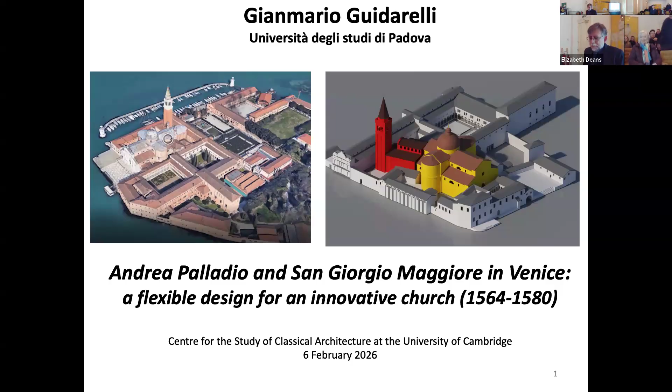And this is the topic of my next book. San Giorgio Maggiore is considered one of Andrea Palladio's masterpieces and one of the most important churches in defining a new type of sacred building after the Council of Trent. Many studies, starting with those by James Ackerman, Wladimir Timofiewitsch, and Christoph Frommel, have highlighted the relationship between the plan of San Giorgio Maggiore and the debate between centralized and longitudinal layouts that was taking place in Rome at the construction site of St. Peter's Basilica in the Vatican.

More recently, research by Andrea Guerra, Guido Beltramini, and Tracy Cooper has highlighted the difficulty in reconstructing Palladio's original design. In particular, there are still many doubts about the choir of the church and the facade, both built after Palladio's death, in 1581 and 1610 respectively. In this paper, I propose to respond to these doubts by adopting a different method for investigation, which takes into account two contextual factors that have been almost completely ignored until now.

On the one hand, the relationship between Palladio's design and existing physical structures can be reconstructed through recent archaeological investigations in conjunction with the analysis of unpublished sources, as well as the use of already known sources. But they can also be studied in an innovative way thanks to digital technologies, in particular georeferencing and 3D modeling, in particular building information modeling.

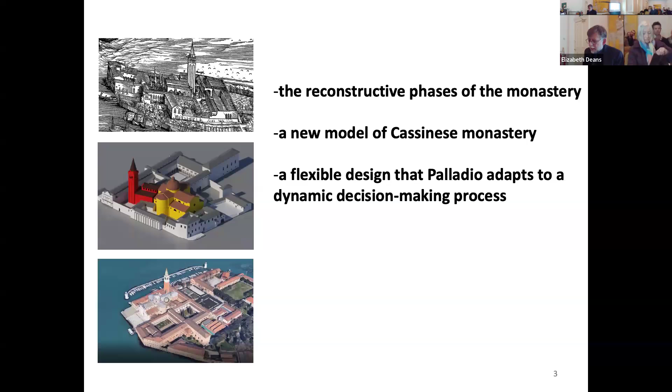In fact, I would like to demonstrate that the design and management of the San Giorgio Maggiore construction site may have been strongly influenced by the monks, who not only imposed design choices based on their needs as a client, which is normal, but also formulated a design program that the architect had to implement. The mindset of these Venetian monks is based on medieval tradition, but also on the reform of monastic life conceived by Abbot Ludovico Barbo at the beginning of the 15th century.

This reform led to the development of a new architectural type of monastery, of which San Giorgio Maggiore is one of the most important examples. The study of the Venetian monastery, in fact, is a part of a more general research project coordinated by me on the architectural culture of the Cassinese congregation founded by Ludovico Barbo in the Renaissance.

The aim of my project, Coenobium, is the study of the architectural and the artistic culture of the Cassinese congregation from a comparative perspective, thanks to the innovative use of the digital humanities.

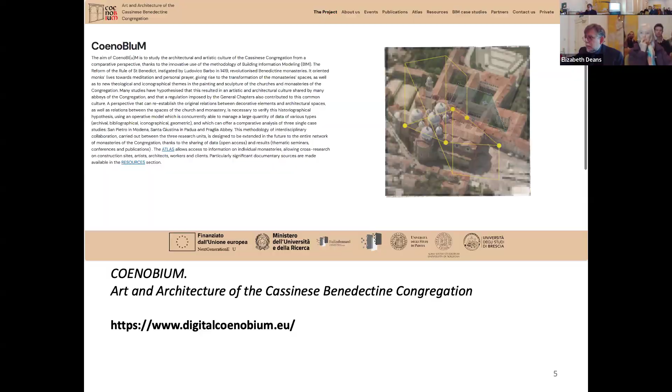San Giorgio Maggiore is one of the oldest monasteries in Venice. According to Francesco Sansovino, at the time of the first Benedictine community following the donation of Doge Tribuno Memmo, the existing church was rebuilt together with the new monastery.

The church, rebuilt again in the 13th century and renovated another time by the abbot Giovanni Michiel by 1519, is the one visible in the view of Venice by Jacopo de Barbari, surrounded by a complex system of cloisters, with the construction site of the new dormitory in full swing. You can see here the new dormitory.

The monastery portrayed in the woodcut by Jacopo de Barbari had been renovated in the previous century following the entry of the Venetian community into the congregation De Unitate, founded by Ludovico Barbo, definitively formalized in 1429. In particular, from the 1440s onward, the increase in numbers of monks made it necessary to plan the reconstruction of an entire cloister, the refectory and the dormitory.

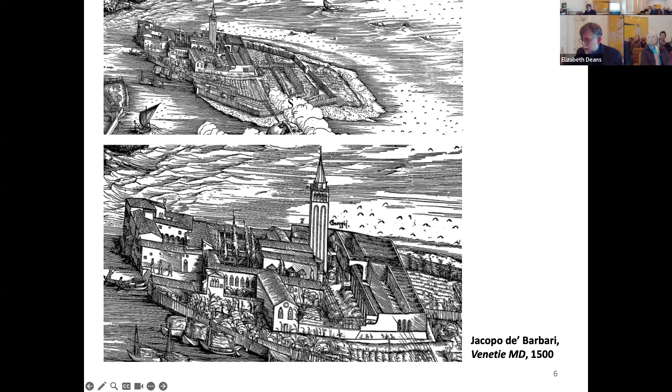This building program, however, only materialized in 1494 with the opening of the construction site of the dormitory designed by Giovanni Buora, and you can see here the construction site.

The study of a map that I published 2 years ago describing the complex of San Giorgio Maggiore in its late 15th century state, in the same year, I think, as the woodcut by Jacopo de Barbari, allows us to reconstruct its real shape in this moment, before the arrival of Palladio. The map preserved in the State Archives of Venice depicts the monastery with great precision before the complex was completely rebuilt at the beginning of the 16th century.

By analyzing the evidence, we cataloged the information provided by the drawing with the use of digital humanities. The isolation of the numerous elements classified and differentiated in the AutoCAD software, a software used by architects, in superimposed layers allows us to hypothesize the temporal sequence of the graphic execution of this drawing and to understand the subsequent phases of use of the design.

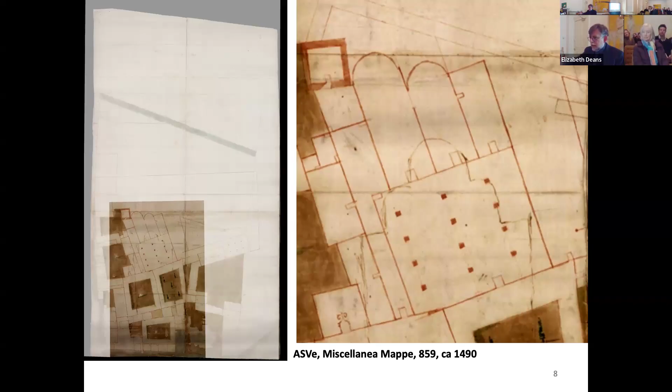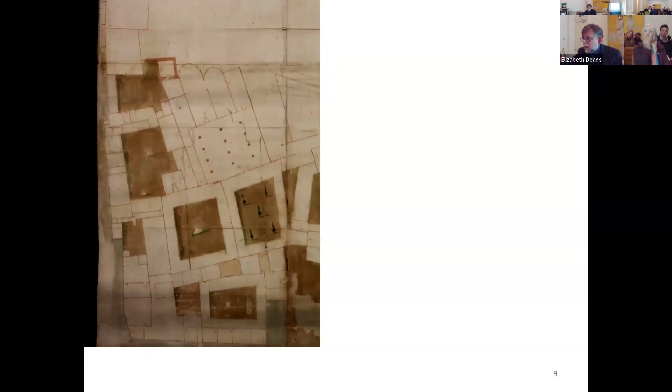By comparing this 2-dimensional image with other 3-dimensional views of the same area and with a large number of archival sources, we were able to create a digital model of the monastery and the entire island. We discovered that the plan later became a basic scheme on which to insert subsequent interventions.

In particular, in the central part of the drawing, a sketch was drawn with the plan of a new church. You can see here in our reconstruction. It is the original design, and it is the digital elaboration of the design. This is with the plan of a new church, which coincides with the one designed in 1520.

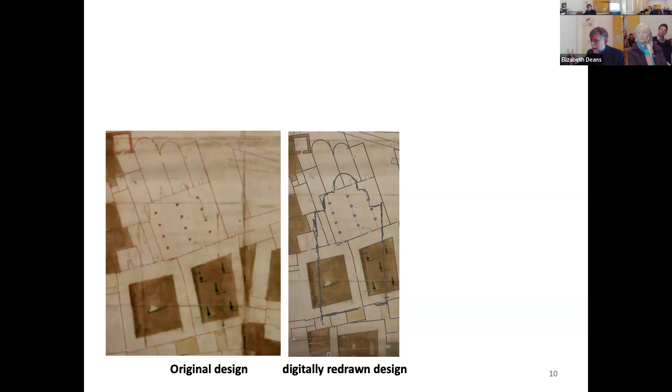This is the design of a new church not built, and you can see new sketches based on the design of a new church. So we used this map as a dynamic decisional process.

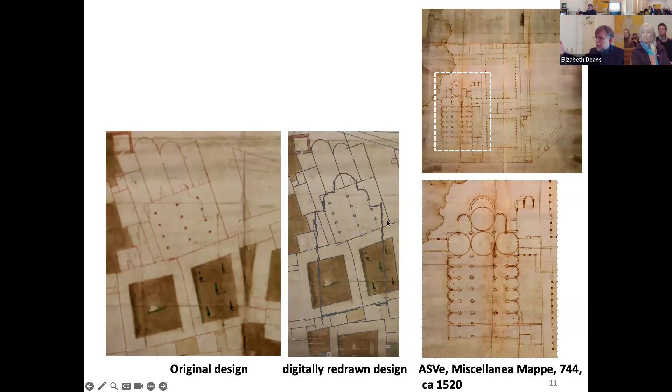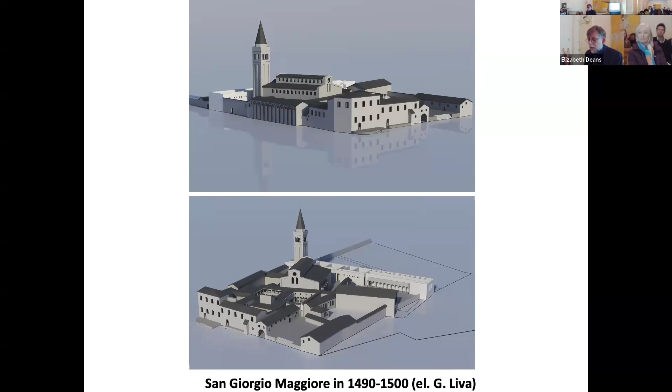The georeferencing of the map was useful for attributing all the information relating to geographical location to the historical graphic data, and for comparing the situation of the 15th century with the current one. We were thus able to demonstrate for the first time that the plan of the medieval monastery is completely different from the shape of the current monastery after its Renaissance reconstruction.

The plan depicts a monastic complex with a church with 3 main aisles separated by rows of square supports that could be pairs of columns on pedestals, and apparently a sub-aisle. You can see here and here. The presbytery consisted of 3 chapels separated from the aisles by partitions, of which the southern one is rectangular and the other 2 are apsed.

In front of the church, there are 2 cloisters which already existed in the 13th century. And in the views you can see here in red the current situation, and in black the reconstruction of the situation of the late 15th century.

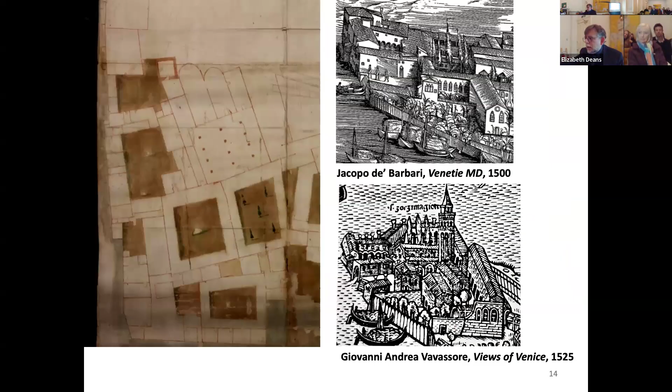In front of the church, there are 2 cloisters which already existed in the 13th century. The views of Jacopo de Barbari, here, Giovanni Andrea Vavassore, and Andrea Pagan, despite some perspective distortions, portrayed them as two large courtyards located between the entrance area on the west bank of the island and the church, with a different conformation that would suggest that they were built at separate times. As we'll see in this digital reconstruction, this was the shape of the monastery in 1411.

Entry into the congregation resulted in a rapid growth of novices in the Venetian monastery, which soon imposed a general reconfiguration of the spaces. In the Pacta, decreed in 1429 for entry of the cenobium in the congregation, Abbot Michiel describes a reconstruction project for the entire monastery with the construction of a new dormitory, cum claustro, to the south, while in the western part of the island, the monks would build a guest house and an infirmary. This is an overall and systematic program of reconfiguration of the monastery, which would be precisely implemented over the following decades, starting with the reorganization of the northern and western front of the island.

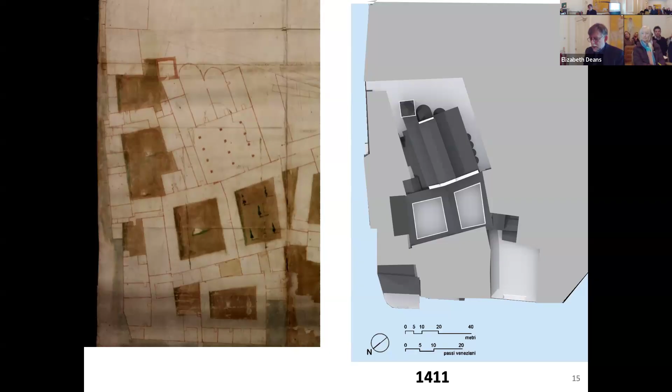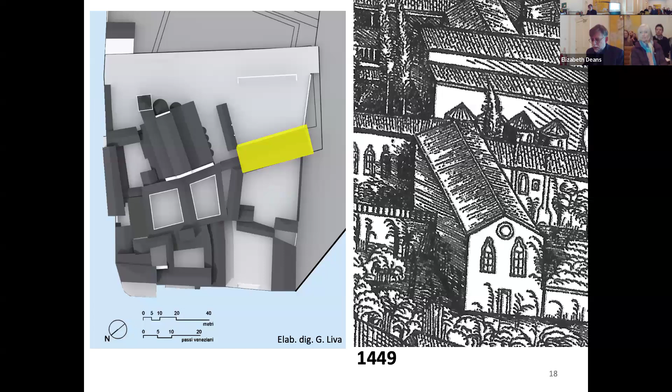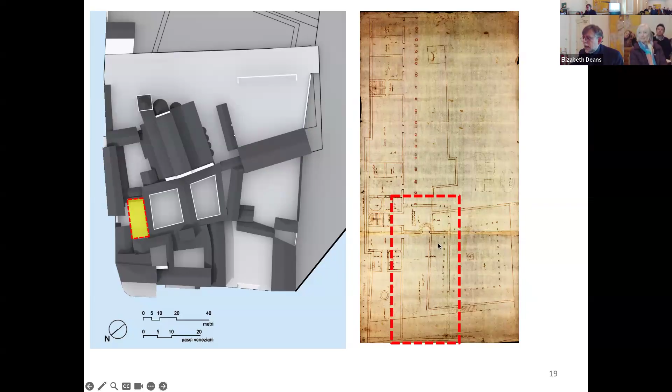With the construction of the northern dormitory, visible on this map of the early 16th century, of the guest house and infirmary, of the southern dormitory, I think for novices, of the refectory that you can see here in this map, published by me for the first time. This is the design of the new refectory and of a new library that we can see here in the Jacopo de Barbari view.

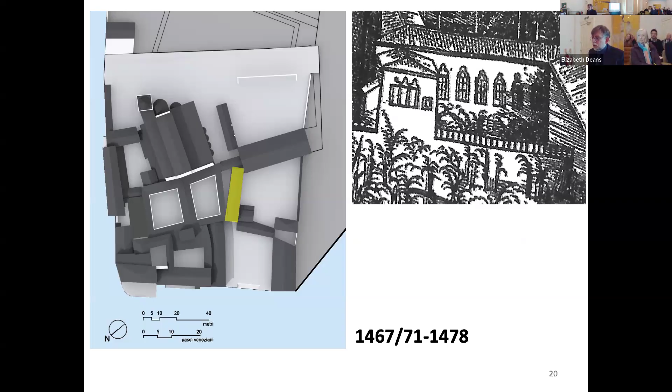The reconstruction program set up by Michiel and carried out by his successor abbots in the following 2 centuries is perfectly consistent with the principle that all the abbots of the congregation founded by Ludovico Barbo followed when they had to rebuild their monasteries. During the second half of the 15th century, the congregation de Unitate and after Cassinese congregation became a network of monasteries which, thanks to the centralization of building policy, the circulation of materials, architects, and architectural ideas, a standardization of liturgical practices, and the development of a common architectural language, became an important protagonist of monastic architecture of the 16th century, and I think also an important protagonist in general of the Italian Renaissance.

This happens above all because the expanding membership of the congregation and the rapid growth in the numbers of monks requires the reconstruction of numerous urban and extra-urban monasteries, favored by prudent economic management. You can see here the exceptional growth of the congregation from the 15th and 16th century. The consequence is the formation of a common architectural culture, which until now has been the subject of studies by scholars such as James Ackerman, Mary Ann Winkelmes, and Guido Beltramini, and me. This shared architectural culture is based on a monastic tradition renewed by Ludovico Barbo, founder of the Reformed Congregation of Santa Giustina, or the Unitate.

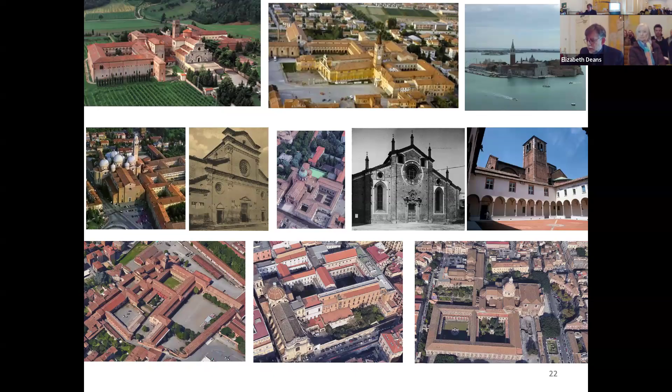From the first years of its history, the Congregation de Unitate was characterized by a complementary rethinking of the monk's individual life, where the spiritual ascent of contemplative activity implied a temporary and partial isolation of the monk. In Ludovico Barbo's vision, the monastic cell became the chosen place for the monk's meditation, study, and personal prayer, as reiterated in the Declaratorium Regulae Benedictine, which indicates the need to divide the dormitory into single cells, so that the brothers can practice prayers and other spiritual exercise.

The consequent multiplication of the numbers of cells led to the need to develop a new planimetric organization of the monastery. Thus, we begin to see a different relationship between the community environment, refectory, library, chapter house, workshop, etc., and the individual cell. This phenomenon of architectural renewal took place at the turn of the 15th century, starting right at the heart of the congregation, on the occasion of the almost simultaneous opening of several construction sites of monasteries in northern Italy, mainly Santa Giustina Padua, the mother cenobium of the congregation, Praglia Abbey, and San Benedetto Po. In all these cases, it was a question of rebuilding pre-existing monasteries, which, once they entered the congregation, experienced a rapid repopulation with dozens and dozens of new monastic professions per year.

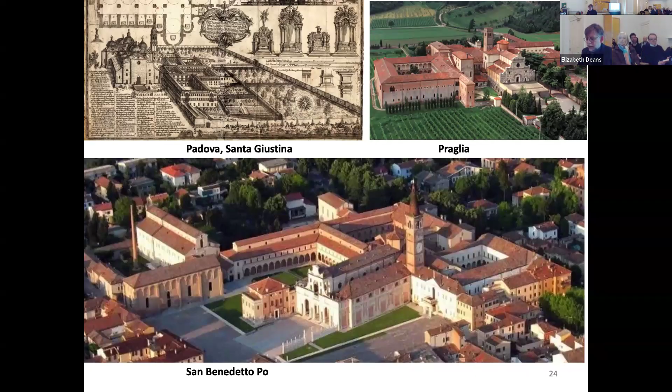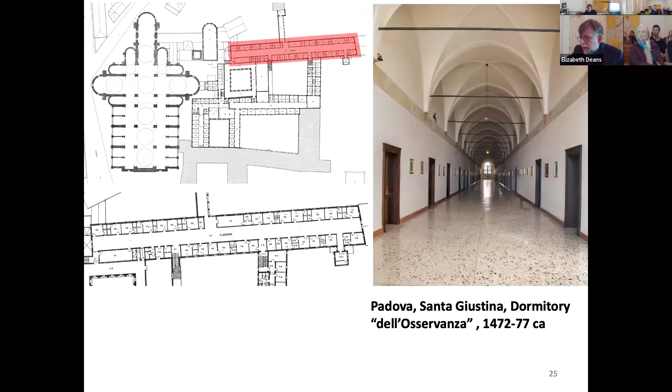One of the solutions adopted in these construction sites to arrange dozens of cells is a dormitory layout in a straight line with a full height central corridor and rows of cells on the sides, according to a model used in Santa Giustina Padua, we can see here, already developed in the convents of the mendicant orders in the Middle Ages. And I think it's very important, this link with the mendicant model. The mendicant model substitutes a unique room for the dormitory, like for example in Cistercian monasteries, with a series of cells. So it's important, Santa Giustina is one of the prototypes of this new architectural model of dormitory, but it's above all in San Giorgio Maggiore in Venice that this model found its definitive form in gigantic dimensions in the Manica Lunga.

This project, developed by Giovanni and Andrea Buora, included a central vaulted aisle consisting of a double-height corridor interrupted by a short transept. Here you can see a short transept, and flanked by two rows of single cells.

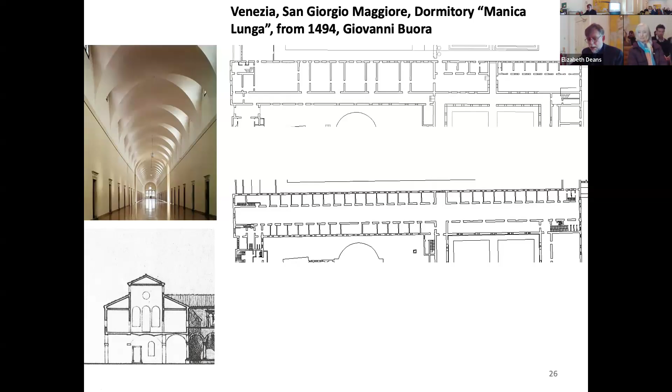In short, it was a question of managing an inhabited construction site in which the sequence of the various components had to be perfectly planned, also providing for a rapid rotation of the abbots, which was a peculiar characteristic of the congregation in all the construction sites of the congregation. In the case of San Giorgio Maggiore, all these criteria are followed perfectly.

For example, in this new monastery, and in those of the congregation in general, the refectory was oversized compared to the effective number of monks. In fact, according to the legislation drawn up by the congregation, the refectory expanded its function as a collective space for the single local monastery, often also welcoming the annual general chapters of the entire congregation, as for example in Praglia and Santa Giustina, and therefore growing in size beyond the real needs of the single local monastery.

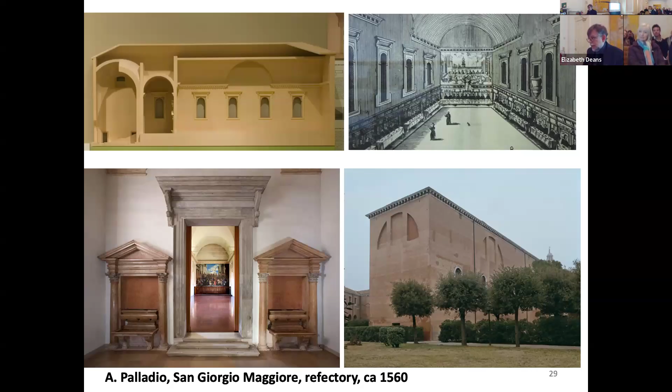A wide staircase leads to a first grand portal through which you enter a vestibule. A second portal leads into the large hall. The latter is covered by a grandiose barrel vault, I think the first barrel vault in bricks in Venice, that turns into a cross to allow the opening of two thermal windows. The design is evidently inspired by the vaults of ancient Roman baths, but also by the refectories of the congregation that had already been built, like Santa Giustina and Praglia.

The imposition of a common norm of the congregation and the development of an architectural culture is especially important for the construction of churches. In fact, on the occasion of the reconstruction of the churches of the congregation, the development of a new architectural solution is clearly aimed at creating a spatial planimetric model peculiar to the congregation, according to a process that can be followed in its general lines throughout the second half of the 15th century.

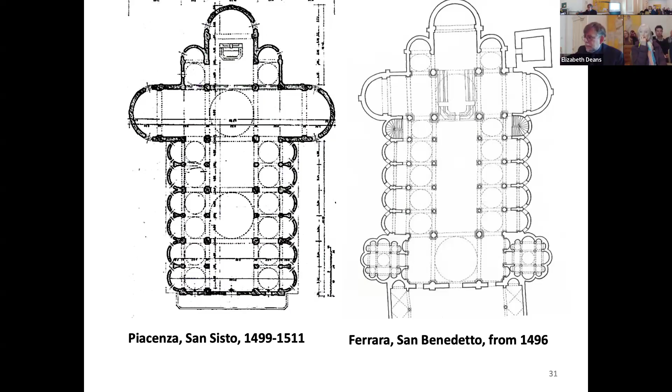These lines of development of a church model peculiar to the congregation are concretized by the reconstruction of the Paduan Basilica of Santa Giustina. In this exceptional construction site in the panorama of the Italian Renaissance, the succession of projects and variations in progress demonstrates how far the design ideas developed in a few decades, because this building was to become the prototype for all the other sister churches of the congregation.

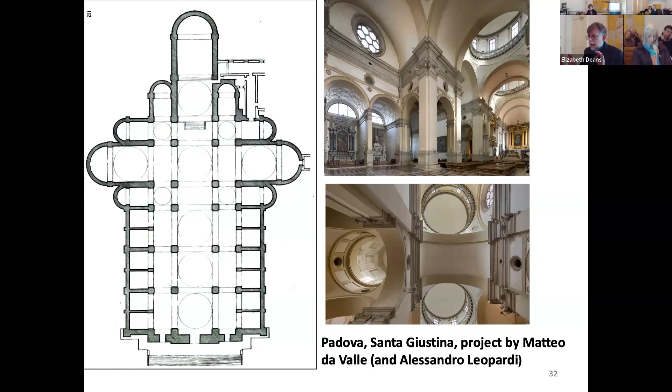Proto Matteo da Valle designed a basilica plan with three aisles, with side chapels and a presbytery. Here, the intersection of the main nave and transept generates three pairs of peripheral chapels. A resolution of 1520 required all churches in the congregation to follow this model. From this moment, all churches have to follow this model.

The first church that was designed following these criteria was probably that of San Giorgio Maggiore, depicted in this project of 1520. Not built, but only designed. This is a basilica divided into three naves with apsidal side chapels, like the chapels of the previous medieval church, a transept with three domes and a fourth dome in the presbytery. Here.

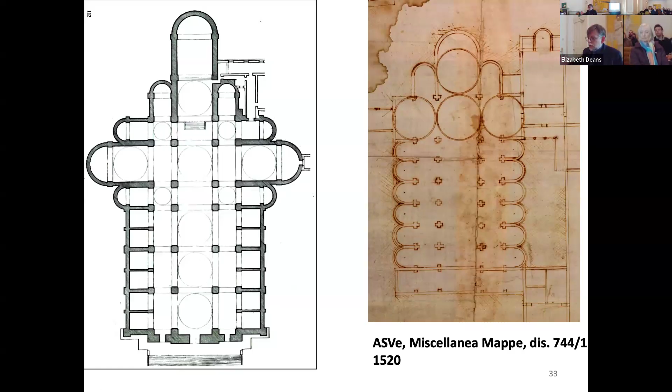According to this project, the pre-existing church and the opposite cloisters should have been completely demolished, and this church was not built, in fact. This is the situation that you can see here, the relationship between this project and the medieval monastery. You can see we do not have a relationship. So the medieval monastery would be demolished.

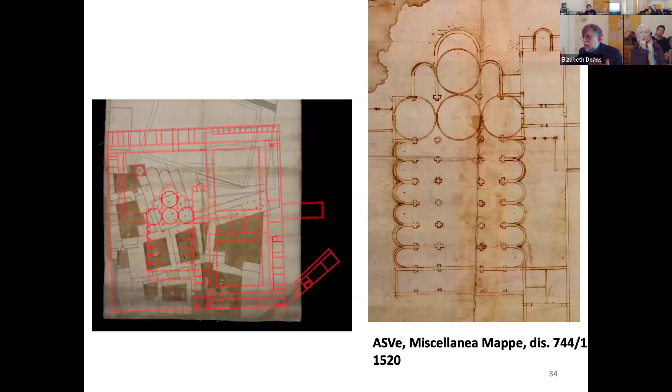This is the situation that Palladio had to resolve when construction of the new church finally began. Next to the dormitory and the first cloister, completed by Buora 30 years earlier, the entire pre-existing monastery still existed. You can see the construction by Buora.

A series of unpublished graphic and archival sources shows that to build the new church, the monks had to demolish only 2 of the medieval cloisters and the western part of the Romanesque church. That is, the choir was to remain in use as long as possible to allow the daily prayer of the monks. You can see here the choir of the old church.

Palladio, therefore, had to organize a construction site that would progressively make space with demolition to be carried out as the parts of the new church were built. Thus, Palladio's project was conditioned by the need to temporarily maintain parts of the old church and the old monastery. It's not an easy situation for an architect.

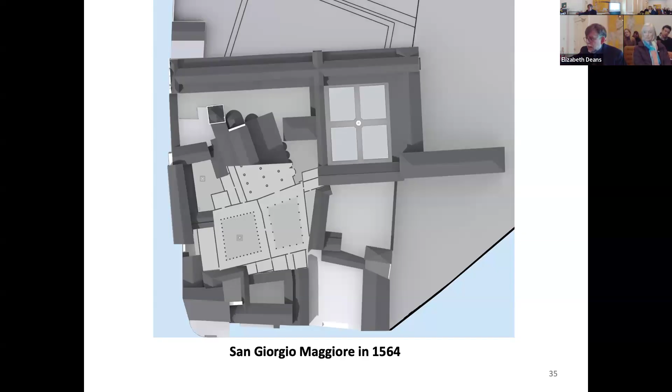The plan elaborated by Palladio in 1564 adopts some aspects of the Paduan scheme of the Cassinese church. It is a basilica plan divided into 3 naves, marked by a sequence of piers with transept, which share the same height and width of the main nave roof, consisting of a grandiose barrel vault with lunettes.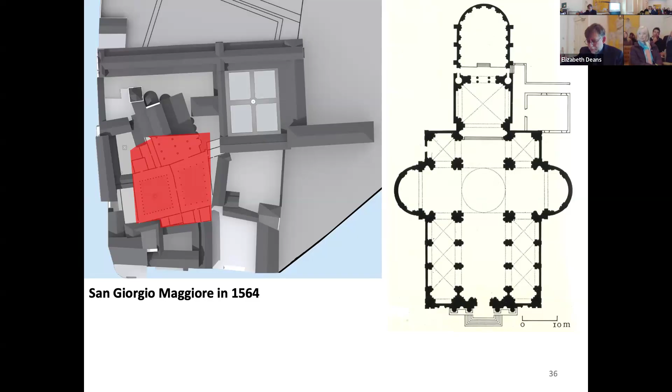The central core of the building is formed by the domed crossing on 4 piers, here, which generates a sort of vast ambulatory consisting of the 2 apse transepts, the last span of the nave system and the eastern span placed between the transept and the presbytery. The reciprocal relationship between these spaces, which recall the ancient Roman baths in their majestic concatenation, is achieved thanks to the use of 2 architectural orders. And the same aerial tribune on which the organ would be built.

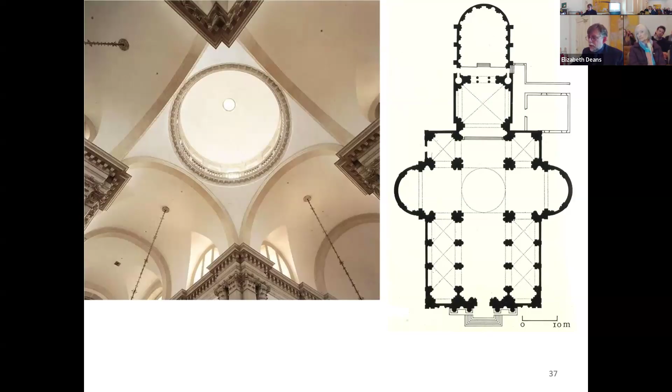Each of the 2 orders, minor and major, corresponds to an entablature that runs along the entire space of the church. The entablature of the minor order constitutes the impost of the cross vaults that cover the aisles and the 2 side chapels of the presbytery, but also appears as 2 horizontal bands in the apses of the transept. It is a perfect construction of 2 orders with a hierarchy of spaces.

This complex but effective use of 2 interacting orders allows Palladio to develop in an organic way an integration between the church model with a centralized plan and one with a basilica scheme, centralized and longitudinal schemes. It was a solution that Roman architects had also been working out for decades for the completion of the new San Pietro in Vatican. Palladio, in his Roman travels, had certainly known the project of Raphael, for example.

In this sense, the plan of San Giorgio Maggiore appears as a sequence of clearly distinct spaces, each with a different function and separated from the other by a series of steps. The body of the church reserved for the faithful, with short naves and a dome at the crossing, and with apsidal transept, the square presbytery for liturgical celebrations, the choir for the monks placed in a first moment beyond the diaphragm of columns.

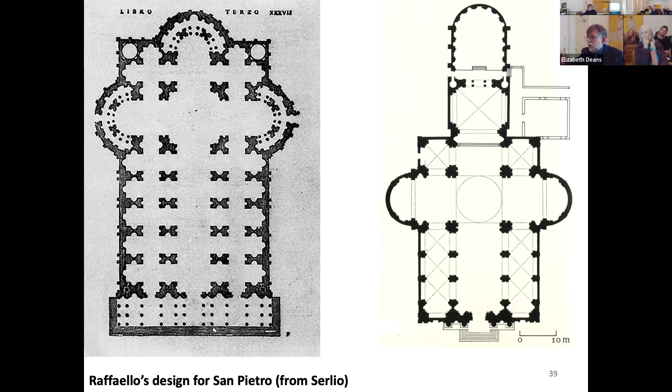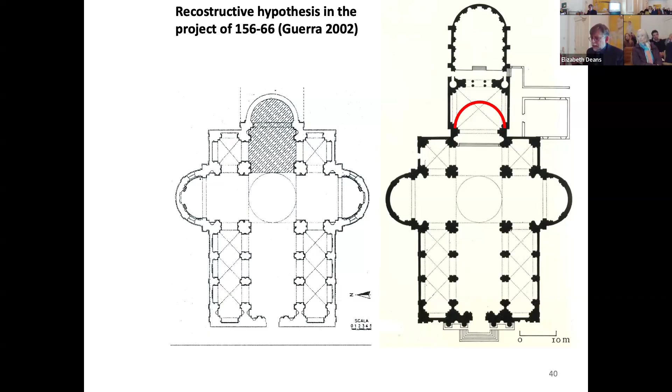Yet, according to Andrea Guerra's reconstruction, Palladio's initial project did not include either the presbytery or the current choir of the monks, but a termination in the form of a column barrier, perhaps an exedra, which would have allowed the conservation of the shrine of the medieval building, with the altar dedicated to St. Stephen and the stalls of the monks.

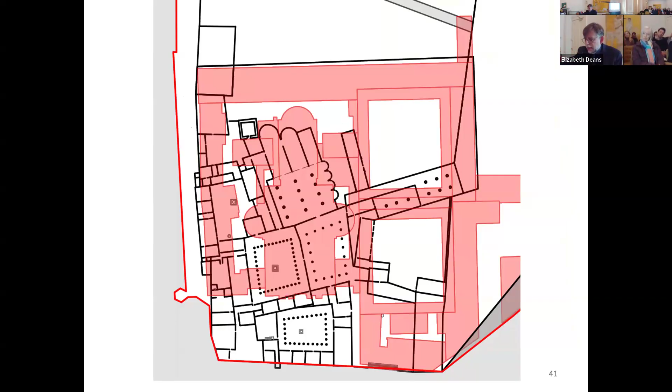The georeferencing of the 15th century map in black overlaid with the current state confirms that this was made possible by the size and perimeter that Palladio had given to this church compared to the pre-existing buildings. A recent georadar survey conducted by me confirmed that traces of the original walls are still visible beneath the church floor.

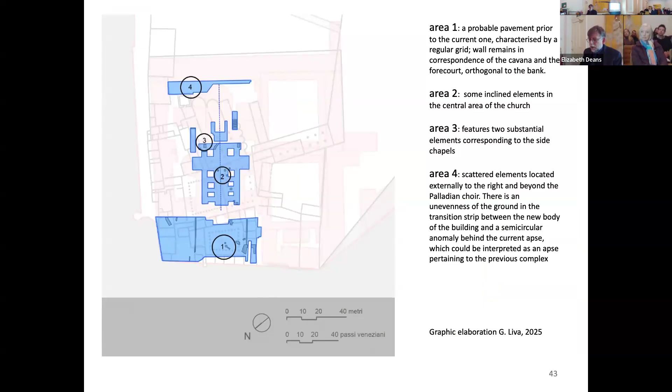This survey also showed that Palladio raised the church on a high podium filled with rubble from the original medieval church and cloister, which were demolished in the mid-16th century. Now, thanks to a new archival investigation, it has been possible to confirm that the old choir of the medieval church remained in use at least until 1579. And you can see here the old choir, the first part of the church by Palladio, surrounded by the old monasteries.

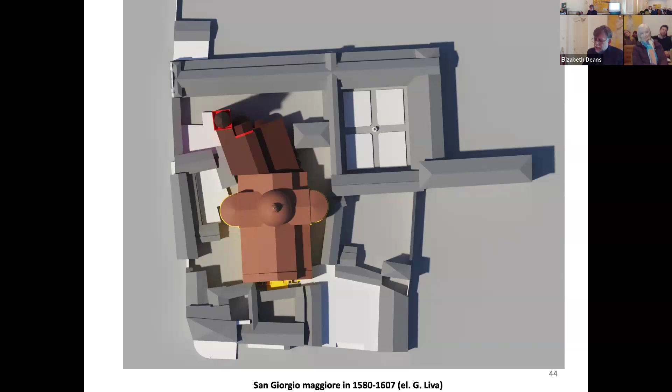Now, I think the monks up until then had not yet decided whether to demolish it or not. This is the architectural mentality of the monks, who tended to keep the presbytery of the church as long as possible, gradually demolishing the cloisters and replacing them with new ones. In Santa Giustina in Padua, for example, every project always planned to keep the choir of the medieval church.

I think it is this uncertainty over the fate of the older choir that explains the subsequent events in the construction of Palladio's church. A second wooden choir was built in the terminal section of the main nave, but it was demolished in 1579 to make the new high altar visible according to the dictates of the Council of Trent. This circumstance triggered a series of transformations which led, in the last part of the 16th century, to the demolition of what remained of the pre-existing church.

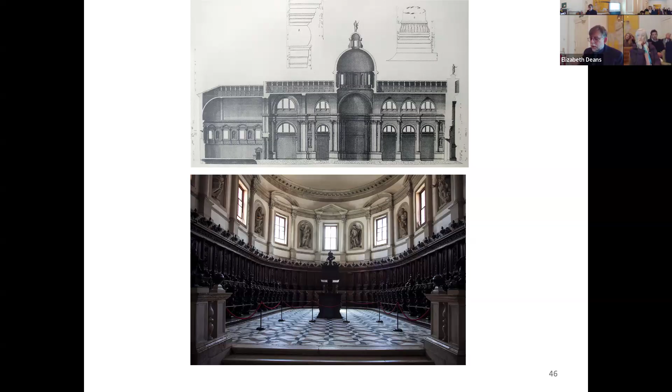The few design drawings we have do not allow us to verify this reconstruction beyond a shadow of a doubt. This plan, for example, describes a situation in which the choir already exists beyond the high altar. And I believe that this drawing is not by Palladio.

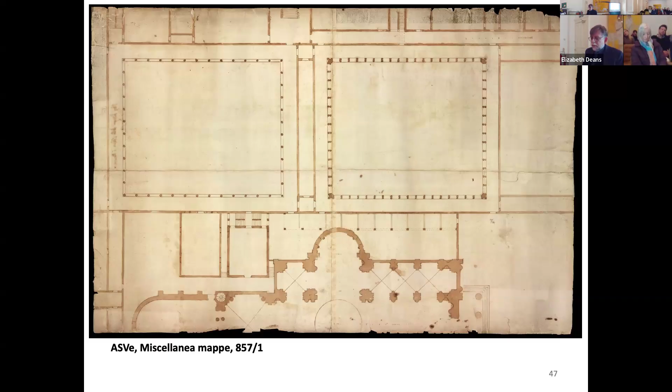However, this drawing provides important information about the other problem that Palladio had to face, the design and construction of the facade. It is clear that the two columns of the pronaos and the steps were added later. The ink and the lines are different, and the color of the background is different. Furthermore, the columns are not aligned with the pillar inside.

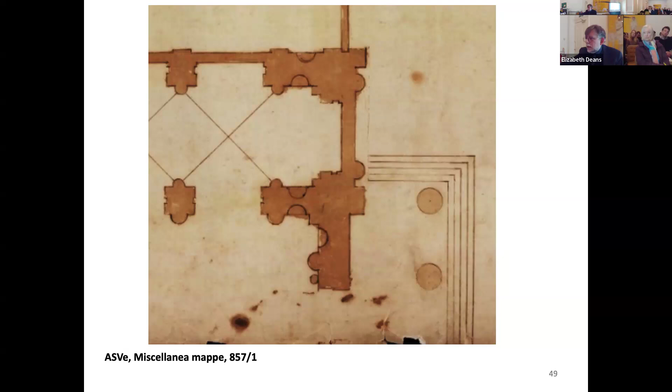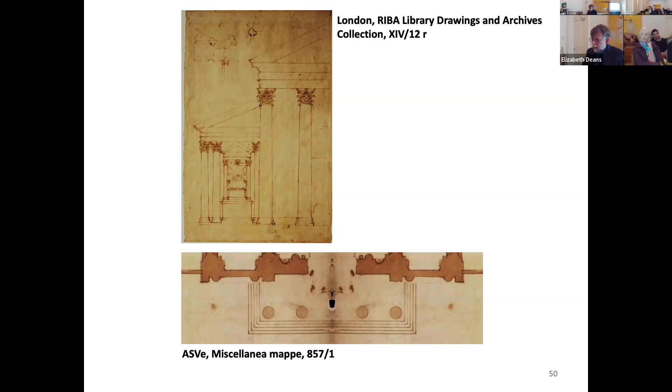However, this drawing must be analyzed together with another one, certainly by Palladio and preserved at the Royal Institute of British Architects. This new drawing depicts a grandiose facade organized according to the compositional principle of two architectural orders. You can see here. It was a very monumental solution that was consistent with the Benedictine mentality of constructing large buildings with a great impact on the urban space.

You can see. But, however, the semi-elevation does not associate a corresponding plan. For this reason, you can see we have different organization of the major order in these two different drawings. For this reason, we cannot know for certain whether the vertical elements were pilasters, half columns, or columns. In particular, we cannot determine whether the four supports of the main order were attached to the wall or whether they formed a three-dimensional pronaos.

In short, Palladio's particular way of representing architecture based on the principle of geometric projection allows the design to be interpreted both as a two-dimensional facade, as in the Palladian facades of San Francesco della Vigna or Il Redentore, and as a three-dimensional one. I think that with this design, Palladio wanted to give the Benedictines a double project.

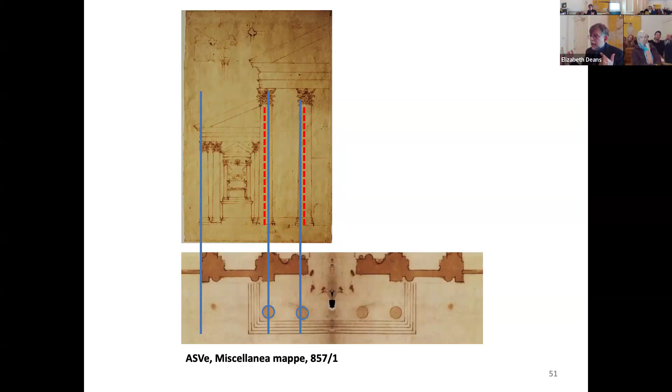The Benedictines had not yet decided whether to demolish the cloister, which still appears, sorry, in some late figures by other authors. And evidently, at the time of Palladio, they had not yet decided whether to build a facade partially covered by a cloister, as in medieval churches, or directly overlooking San Marco basin.

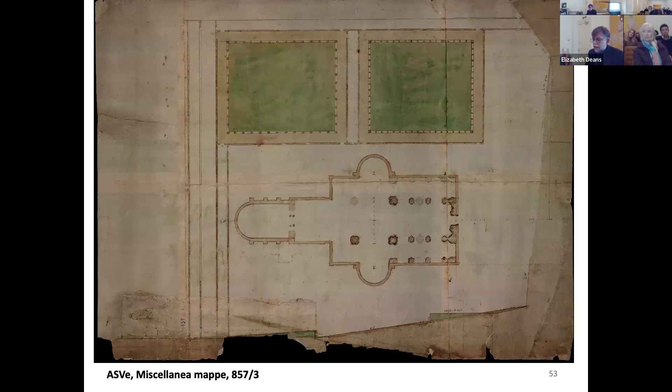The analysis of another drawing, which has been little studied to date, could confirm that the possibility of a two-dimensional or three-dimensional facade remained open until the very end. This is a drawing that shows the work of several different people, rich in information and multi-layered. In particular, the internal structural elements are drawn with several alternatives, and if someone were reflecting on the internal proportions of the building, clearly, this could suggest an initial design phase. This circumstance would have had an important repercussion on the dating of the cloister, probably designed by Palladio.

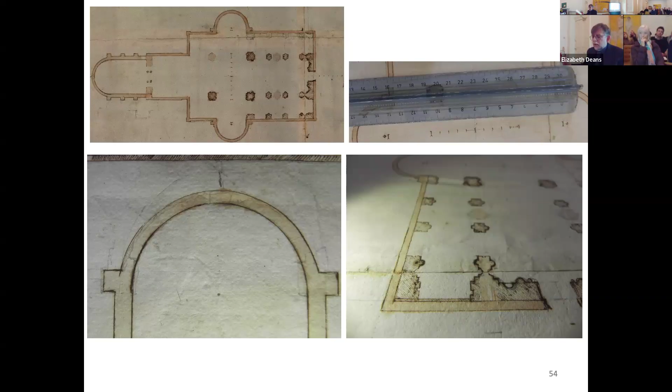I don't think that this drawing is by Palladio, and perhaps it was made after his death. But the scale was certainly drawn by one of Palladio's collaborators. In any case, its analysis supports the hypothesis of a double alternative design by Palladio. However, from the beginning of the construction site, the Benedictines postponed the construction of the facade in order to keep the two opposite cloisters as long as possible.

Indeed, as evidenced by a document of 1595, Michele Veneto, abbot of San Giorgio Maggiore, had purchased 12 Verona stone columns for the construction of a quadriportico for the church. This portico would have kept the memory of the pre-existing cloister and would certainly have conditioned the shape of the facade, which would have lost the pronaos designed by Palladio.

Meanwhile, for more than 30 years, Palladio's church was partially covered by the medieval cloister, as evidenced, as shown before, by many graphic sources. This is just one of the many episodes inherent in the debate on the construction of the church, which, as we know, involved leading political figures such as Marcantonio Barbaro and Leonardo Donà. In fact, the facade was finally built between 1607 and 1610, thanks to the intervention of Leonardo Donà, who promoted the demolition of the western part of the medieval monastery.

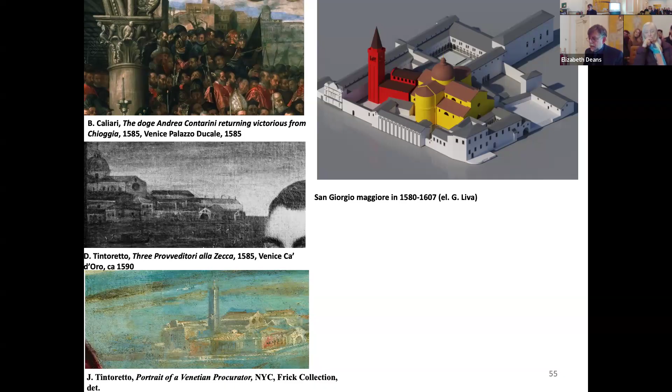Yet the Doge would transform the facade of the church into a scenic backdrop on the urban scale, perfectly congruent with the use of the monumental facade, which was typical of the Cassinese churches. In this case, therefore, the political monastic mentality literally crushed the architect's project. Ultimately, in my opinion, Palladio, who was tasked with a building program developed by the monks but not yet finalized at the time of his death, came up with a flexible design.

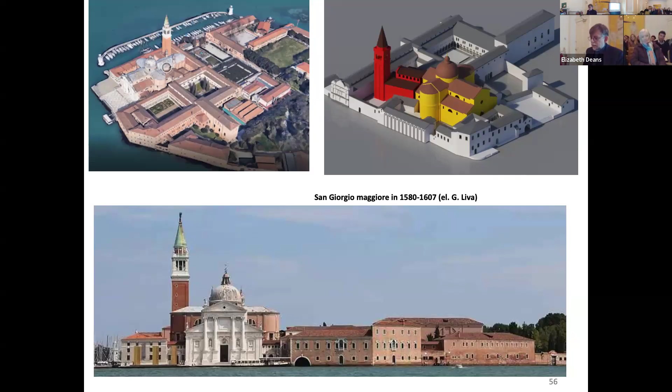The church design was constrained by two factors. On the one hand, there was the need to respect the existing buildings that completely surrounded the site where the church was to be built. On the other hand, there was indecision at the time the construction site opened about whether to preserve the existing choir to the east and the medieval cloister to the west. Palladio thus created an open project where someone else could have made the final decision, thus implicitly laying the foundation of Palladianism.